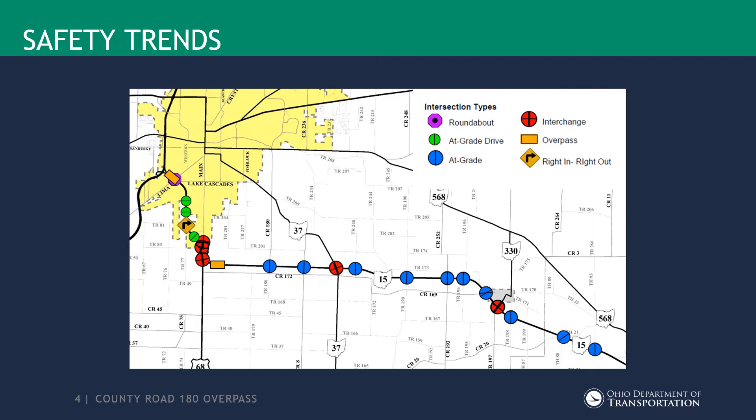Across the state, traffic fatalities are on the rise. From 2017 to 2019, 139 people lost their lives in 121 fatal crashes traveling the highway system within the jurisdiction of ODOT District 1. District 1 represents an 8-county region in Northwest Ohio, including Hancock, Putnam, Paulding, Defiance, Wyandot, Hardin, Allen, and Van Wert counties. 10% of the fatal crashes experienced in our region are attributed to at-grade intersections. Further, 155 crashes in District 1 occurred at at-grade intersections, resulting in 63 injury crashes and 12 fatal crashes.

The chart gives a breakdown of the State Route 15 corridor through Hancock and Wyandot counties. Accounting for nearly 16% of all of State Route 15's at-grade intersections, the County Road 180 intersection has the highest crash rate among all the State Route 15 intersections listed. Along with the high crash rate, 180 is the ideal location for an overpass for several reasons. It is centered between two interchanges, US 68 and State Route 37. There is also a heavy through movement crossing State Route 15. This through movement indicates that many people are using this location to cross State Route 15 to access areas within Findlay.

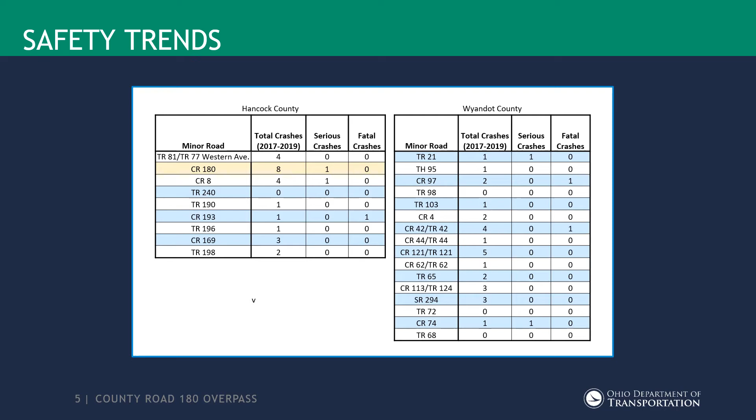Since the majority of people using the intersection are using it to cross 15, its proximity to access to State Route 15 at US 68 and State Route 37, and its high crash rate, County Road 180 is the preferred location for an overpass.

I'm Sergeant Ryan Purpura with the Ohio State Highway Patrol. Oftentimes, the crashes that troopers respond to at at-grade intersections are catastrophic, where the potential for loss of life or severe injury is high. Vehicles traveling at highway speeds can have devastating effects when striking a vehicle which failed to yield at an at-grade intersection. An overpass over a divided highway would eliminate any chance of a crash occurring between cross traffic and vehicles traveling on the divided highway, making it safer for the motoring public.

We know there are safety concerns associated with at-grade intersections, not only around the state, but right here in Hancock County. So what is ODOT doing about it? At approximately $150 million annually, Ohio boasts the third largest safety funding program in the nation. Typically, our funding goes towards preserving the roadways, bridges, and culverts of our transportation system. Safety funding is unique in that it allows our team of transportation professionals to implement projects with only one goal in mind: reducing fatalities and serious injuries.

For the past several years, the traffic and safety team at our local ODOT District 1 office in Lima have developed or are currently developing long-term access plans for four-lane divided highways. The purpose of these plans is to determine where access needs to remain, can be eliminated, or needs improved. The ultimate goal is to convert these divided highways into true limited access corridors and eliminate all at-grade intersections. This can be done via a combination of overpasses, interchanges, and cul-de-sacs.

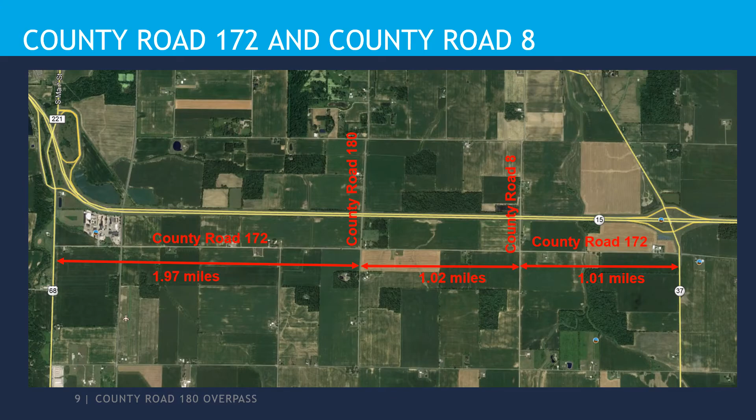Hello, my name is Patrick Schwann. I am the project manager from the engineering firm Richland Engineering Limited, a Wallace-Pancher Group company. Our firm is evaluating improvement design at the County Road 180 intersection with State Route 15.

The purpose and need is the basis for a project and identifies the problems that need to be addressed. As discussed earlier in the presentation, this location has a history of numerous crashes, primarily caused by the limited available openings in State Route 15 traffic to allow County Road 180 vehicles to cross through the intersection.

The limited gaps or openings in State Route 15 traffic create a delay for County Road 180 traffic waiting at the stop sign, often prompting individuals to become impatient, taking a chance that they can make it across the State Route 15 roadway safely. The purpose of the project will be to improve safety at the County Road 180 intersection.

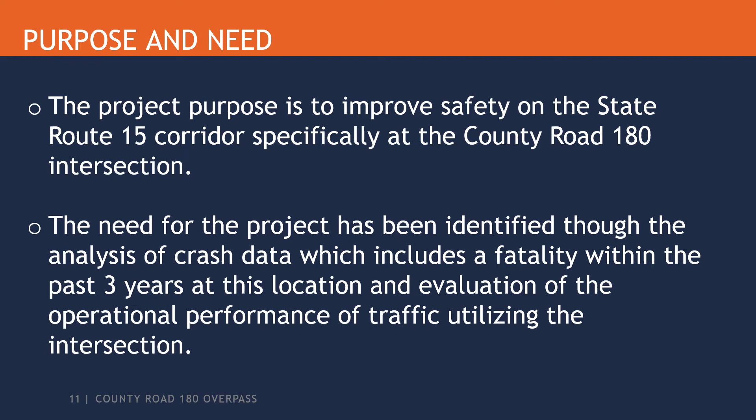A feasibility study was prepared in 2019 for the State Route 15 corridor in Hancock County. 4 alternatives and a no-build alternative were studied, including installing cul-de-sacs, installing restricted crossing U-turns, also known as R-cuts, constructing an overpass, or constructing an interchange. Impacts associated with each of these alternatives were studied, including environmental, right-of-way, utility, and cost. The no-build alternative does not meet the purpose and need to improve safety at this location.

The overpass bridge photo is taken from State Route 15 at State Route 37 as an example of what the overpass bridge at County Road 180 could look like. The bridge will need to be high enough to allow State Route 15 vehicles to pass under the overpass bridge.

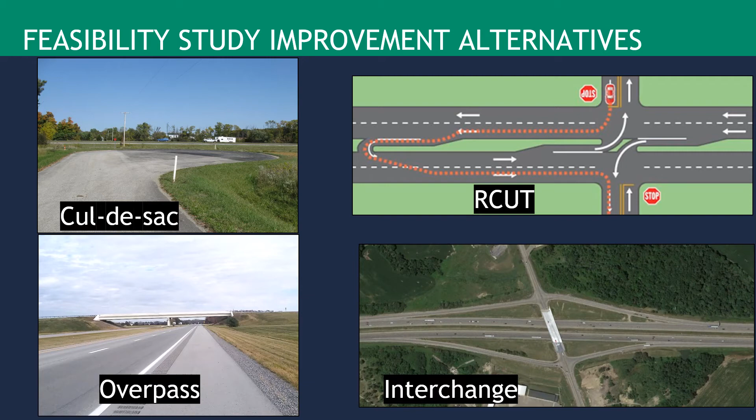After review of the concerns for traffic volumes, crash reduction, stakeholder involvement, along with evaluating impacts to the environment, right-of-way, utilities, and cost, it was decided that the preferred alternative for this location is a County Road 180 overpass of State Route 15 with an estimated cost between $2 to $4 million. The cost for the 4 alternatives varied from $250,000 to construct a cul-de-sac at the intersection to $14 million to construct an interchange at the County Road 180 location.

As mentioned, there is a crash history at this location. The traffic at this intersection is the highest of the locations evaluated in the State Route 15 corridor access study. Turning movement counts show that 80% of the traffic at this intersection is through County Road 180 traffic crossing over State Route 15. The proposed overpass would allow for all cars to continue to utilize County Road 180 as a way across State Route 15 while alleviating the crash patterns.

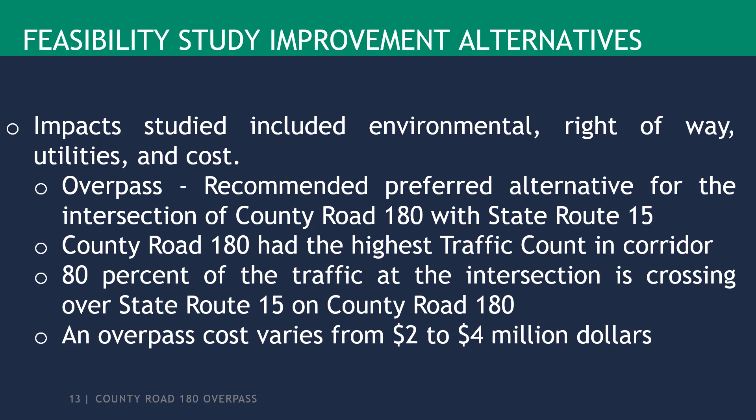Utilizing the preferred alternative of a County Road 180 overpass of State Route 15, the proposed elements of the project improvements were determined using ODOT design criteria. The proposed improvement design elements are controlled by the utilization of the County Road 180 roadway. The current traffic volume is 1,149 vehicles a day on the south approach and 1,745 vehicles a day on the north approach. The planned design speed will be 60 miles per hour with a legal speed of 55 miles per hour.

The proposed County Road 180 horizontal alignment will be tangent, extending from the center of the existing roadway south of State Route 15 to the center of the existing roadway north of State Route 15. The proposed profile of the overpass roadway will need to be high enough to allow vehicles to pass under the proposed overpass bridge. This minimum vertical clearance is 16.5 feet. All components of the proposed bridge will need to be above this height over State Route 15.

Overpass structure types are being evaluated to determine which one is the most economical and meets the need of the project. The grade on the proposed road, increasing from the existing roadway south and north of State Route 15, will be no greater than 5%, or a change of 6 inches vertical in 10 feet of distance. The profile of the roadway will be smoothed out with curves between changes in grades to improve the rideability of the roadway.

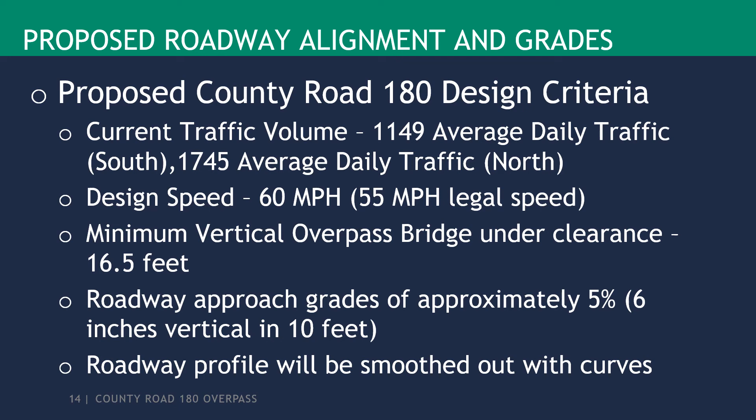The proposed improvement will transition from the existing 20 feet wide roadway width. The bridge roadway opening width will be between 30 to 32 feet between the bridge parapet. The roadway width, consisting of travel lanes and treated shoulder, will be between 30 to 40 feet in width from the face of the guardrail at areas where guardrail will be needed.

Guardrail will be installed between 4 to 8 feet offset from the edge of the travel lanes. Beyond the treated shoulders will be grass shoulders. The improvement elements will be further refined with detailed final design.

Roadside ditches, similar to the existing ditches, will collect the drainage and be directed to flow to the same outlet as the existing location. The grass slopes on the side of the proposed roadway will be evaluated for ease of maintenance, limit the amount of grading impacts that will require additional right-of-way, and provide positive drainage.

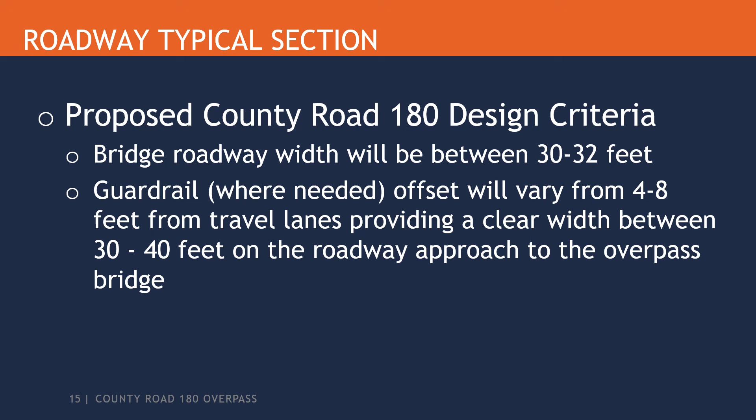Limited improvements along State Route 15 will be needed. The existing State Route 15 median pavement will be removed. The existing County Road 180 pavement will be removed where the overpass bridge will be installed.

During construction, County Road 180 will be detoured. The anticipated designated detour route will utilize County Road 172 to State Route 37. State Route 15 will remain open to traffic during construction. However, the improvement will require restricting the roadway to one lane in each direction to construct the improvement along the outside and inside shoulders. Short-term interval complete State Route 15 closures, likely at night when traffic volumes are lower, will be needed to install the overhead bridge beams.

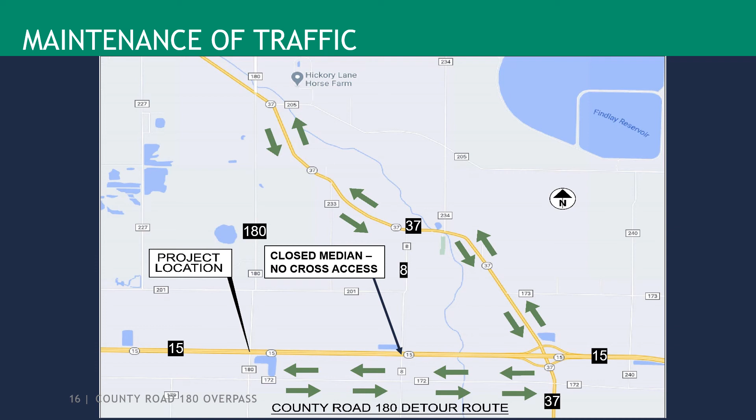The State Route 15 median access for through movements will be closed at County Road 8 during County Road 180 construction. County Road 8 traffic at the intersection will only be able to turn right onto State Route 15.

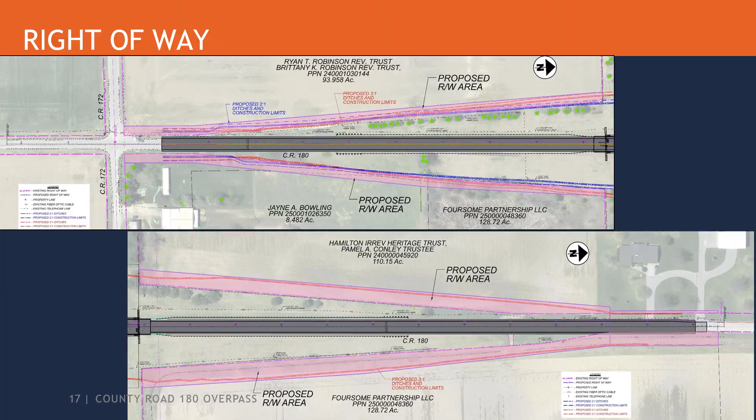The project is currently in the preliminary development phase. Public involvement comments will be reviewed and a response provided. ODOT will be reviewing the preliminary design information to confirm the project scope of work. The detailed design will further prepare project documents to obtain environmental clearance and obtain the necessary right-of-way to construct the project. Once the final plans are complete and the necessary clearances are obtained, the project will be prepared for the construction phase.

Currently, funding for construction is available in 2025. However, the project development will continue through the process in case funding could become available sooner. If funding would become available, the project could begin as soon as 2022.

Your input on the proposed overpass at the intersection of State Route 15 with County Road 180 is important and will be used to help guide decision-making throughout all phases of project development. The virtual presentation is an opportunity to review the project material and hear from the project team. As indicated by the timeline, the next step in the project is to obtain comments from the public, respond to the public involvement comments, and ODOT review of the preliminary documents developed for the project prior to finalizing the design.